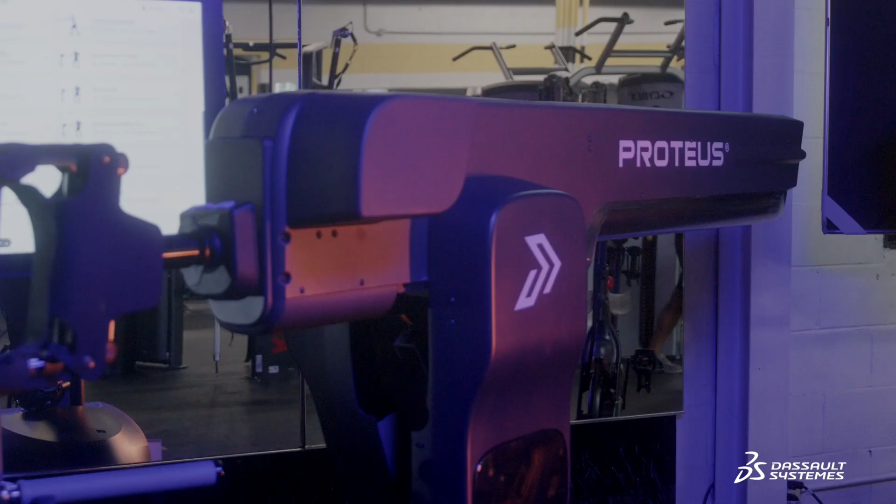Proteus Motion is a sports science lab in a box. It's a completely different modality of training, something you can't replicate with any other machine. We've proven through laboratory testing that the muscle activation from three-dimensional resistance, compared to existing methods, produces much more muscle activation, giving you a more efficient workout. Anytime you move the machine, it directly opposes your motion.

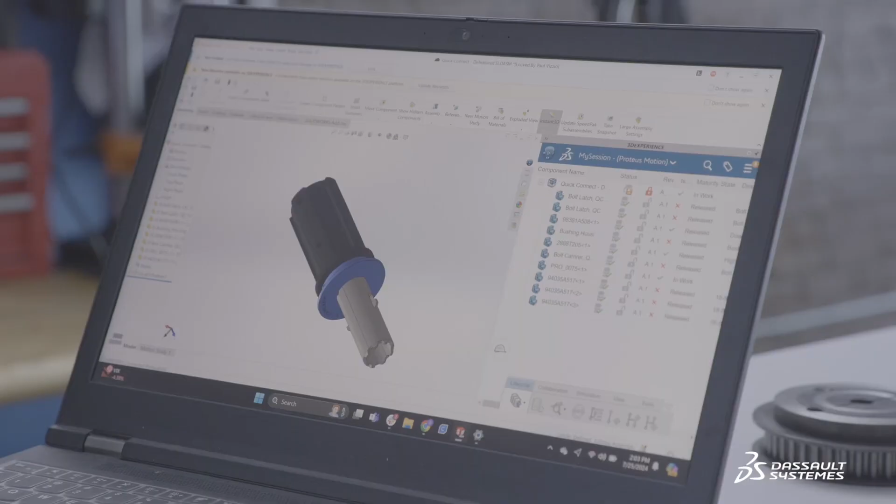The hardware takes a lot of CAD, and that's really where SOLIDWORKS comes in. We needed surface modeling, more advanced features, Hole Wizard, things like that. We were in COVID times, and I found out about the 3DEXPERIENCE version of SOLIDWORKS at that point. Once I saw what was being built, I was like, okay, this is exactly what we need.

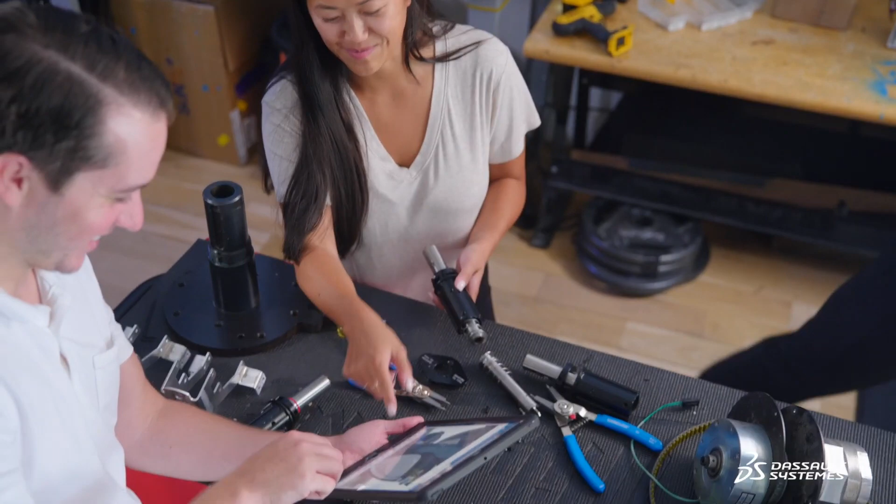We needed some type of cloud-based platform, and having it running SOLIDWORKS is the best of both worlds. We got really good at being able to work together remotely through the platform. It's great to be able to open up a design together, look through it, and go through everything live.

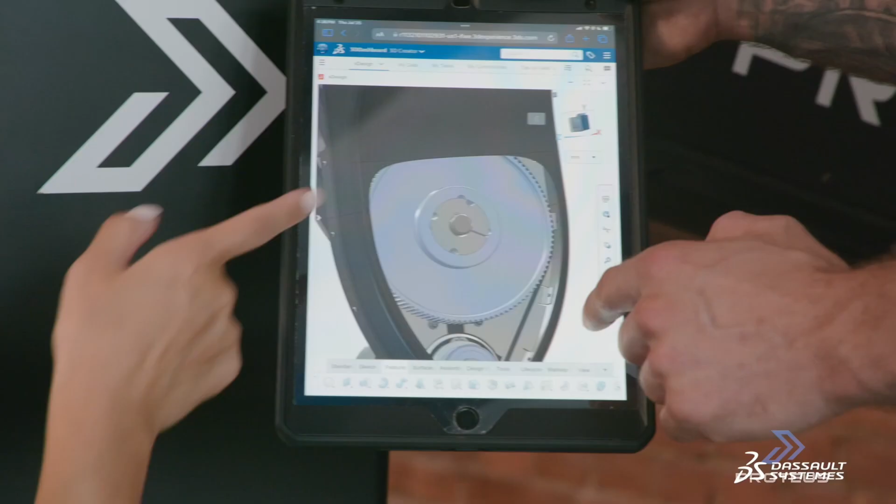The capabilities of SOLIDWORKS are pretty limitless for us in terms of the modeling, the drawing, and the management side of things. Something that helps alleviate stress in my day is being able to manage that lifecycle stuff right from the side panel. So I'm in a model, I make a change, I save it, I get that little check mark that it's saved to the cloud, and I can let Paul know the model's good, and he's got every up-to-date change I've made in the last 5-10 minutes on that model.

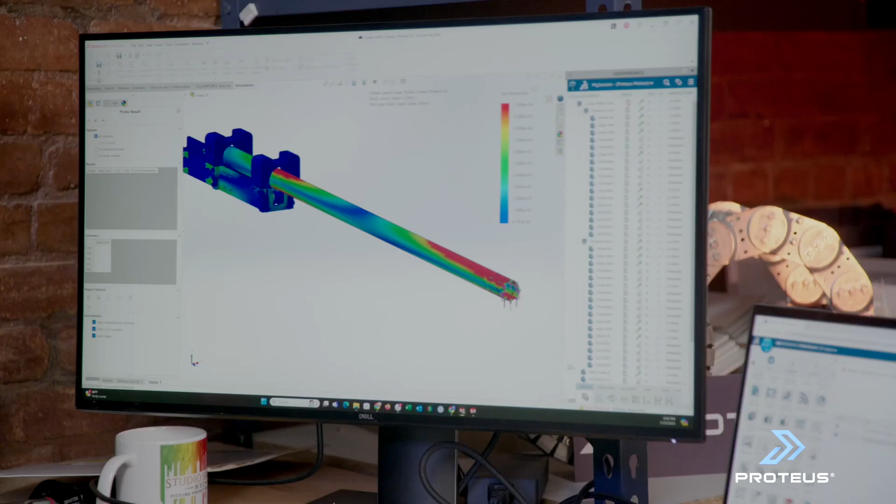We needed rendering capabilities and FEA capabilities. FEA simulation has definitely been a huge help for us, as you can imagine, having professional athletes on this machine, it undergoes a lot of force.

There's probably 300 unique parts in this, and each one is used multiple times. With simpler CAD platforms, that just breaks them, and it gets really confusing with mates and constraints and things like that. That's another reason I liked SOLIDWORKS, it worked much better with larger assemblies than what we were using beforehand.

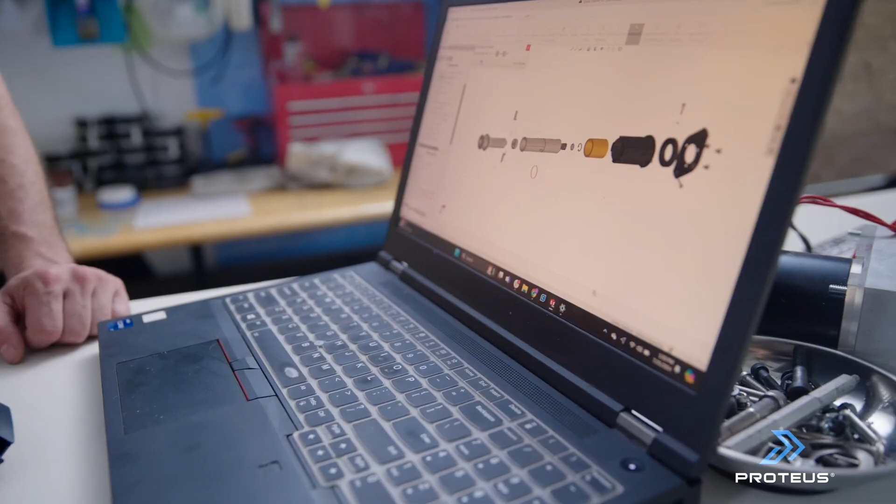It's just been that much easier with my collaboration with Paul, especially those drawings in the beginning, getting those done as fast as possible so that we can really start working with an external manufacturer.

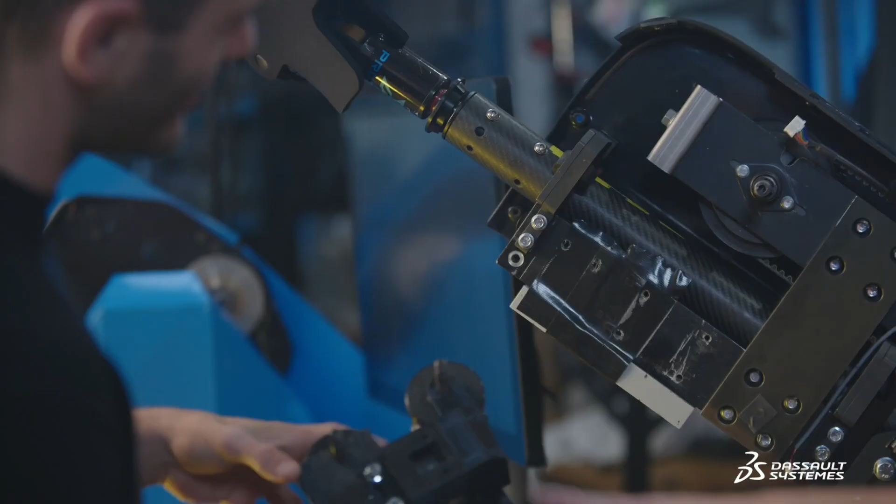When I think about where Proteus is going next, I see continued growth of machines across the country. I also see the ability for us to make some really cool design changes that we haven't been able to focus on, just because we're a small team.

SOLIDWORKS is going to help us in that journey, seeing how design changes play out on the product through the model. We're always going to make improvements, even down to things like our packaging and the user experience of unboxing it. All of those things we design in SOLIDWORKS, and it's going to have a huge effect on everything for us moving forward in getting a better customer experience.

Okay, so now we've been introduced to Proteus. Let's use the Proteus apparatus to show what's new in SOLIDWORKS 2025.

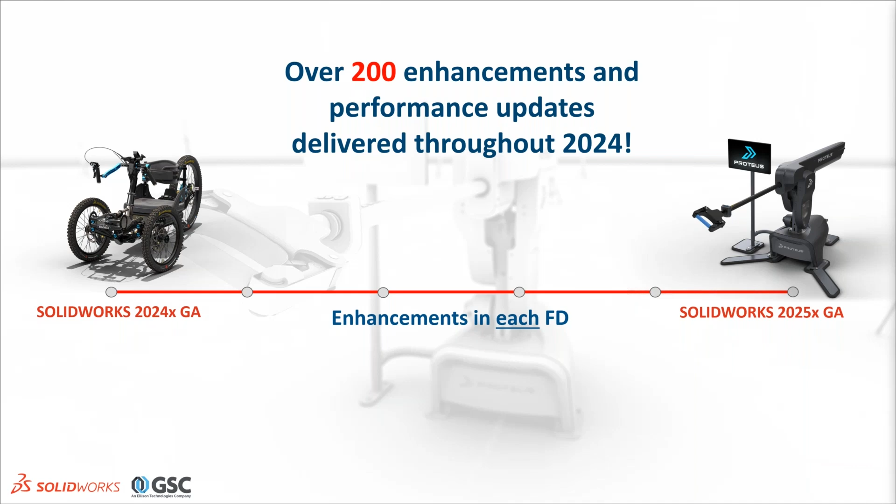I also want to point out not just 200 enhancements, but another number: 33. That's the number of releases now of SOLIDWORKS, not necessarily the number of years. SOLIDWORKS was first released in 1995, so it's 29 years out there, but early on we had two major releases in the same year for a number of years. So this is the 33rd major release of SOLIDWORKS.

In addition, there's another meaning personally for that number: this is my 33rd year at GSC. I predate SOLIDWORKS, and GSC predates SOLIDWORKS, having come to the company in '92. I've completed 32 years, I'm in my 33rd year at GSC. Some of you have been around for the bulk of that time, and every once in a while we look around and say, wow, things have gotten pretty awesome and have changed quite a bit.

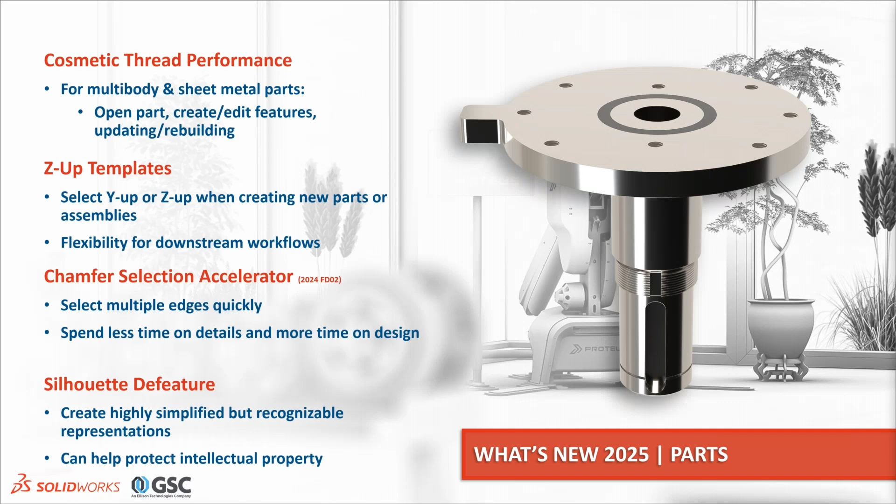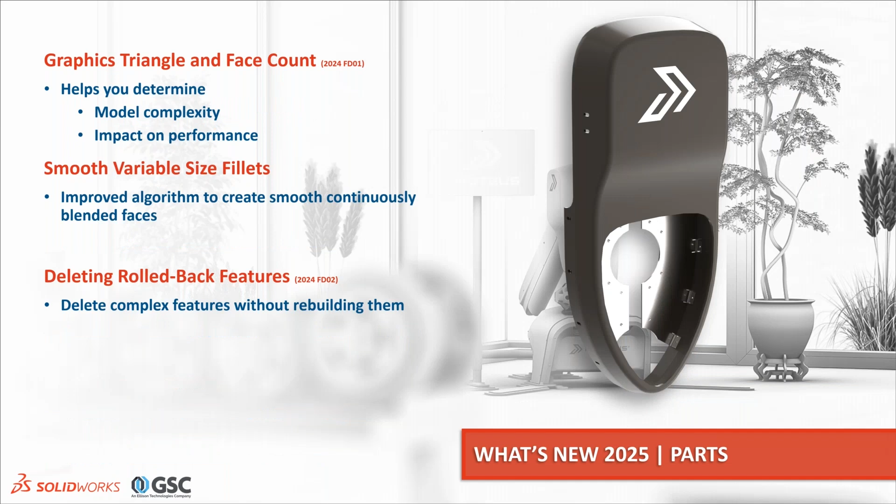There are some nice little behind-the-scenes things that make some things go faster, like with cosmetic thread. Some of you longtime people might notice Z-Up is a thing now. We have some enhancements to some old favorites like the chamfer tool and variable radius tool. We're getting some additional diagnostic tools and repair functionality that's really nice, as well as new and streamlined workflows for things like measuring a projected area of a 3D part. So let's get into it.

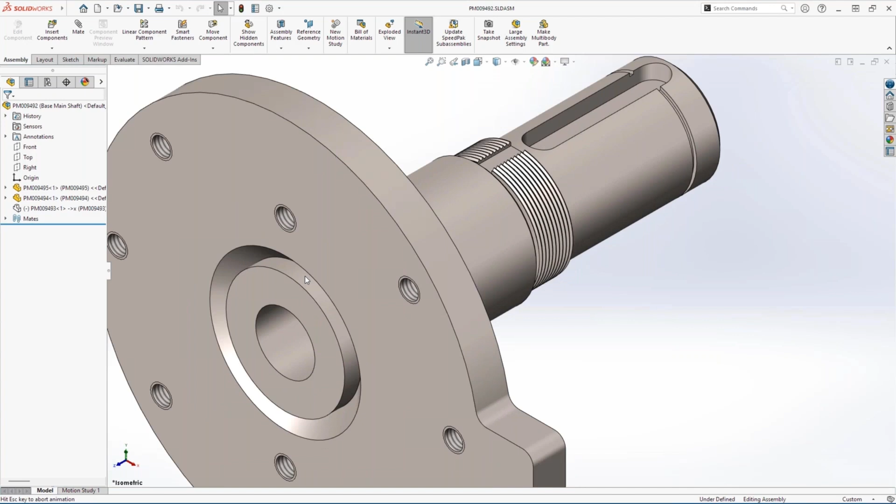First of all, when you have a lot of cosmetic threads, like in the parts in this assembly, you should notice a significant increase in performance just working with those. When I take a look at this assembly and want to make a multi-body part for manufacturing, notice we have Z-Up as an option for new parts created out of our new template.

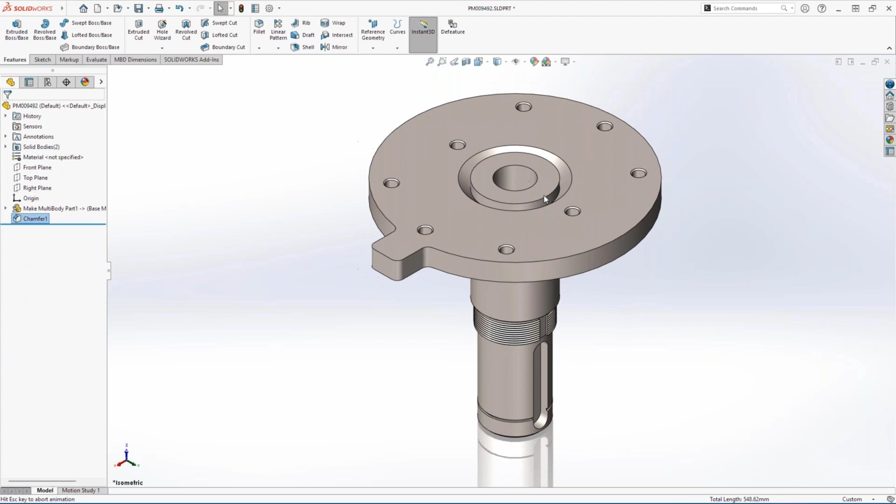So this is a multi-body part. I'm going to do some chamfers on here. You'll notice in 2025, when we do a chamfer, we can now have the same selection accelerators we've enjoyed for years with the fillet command, now available on the chamfer command. I'm going to do a new thing called a groove bead between these two bodies, just picking these two faces and having it put that in there. We'll explore that a little bit more later on in our session.

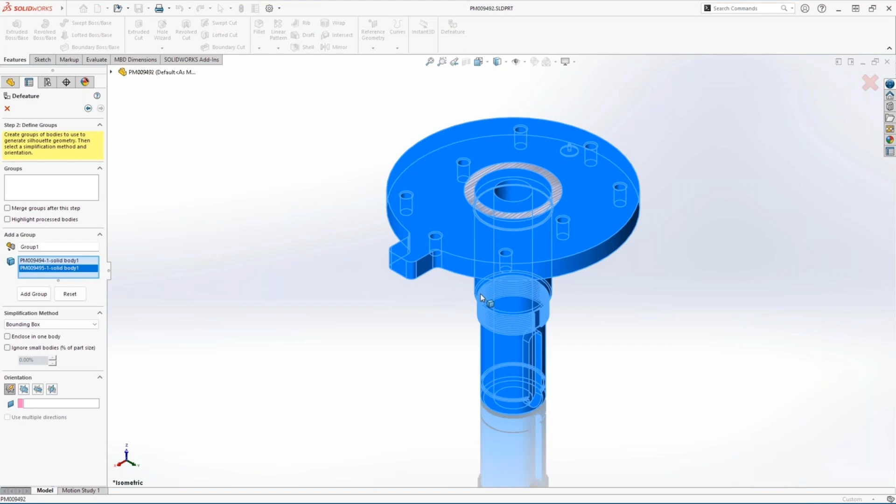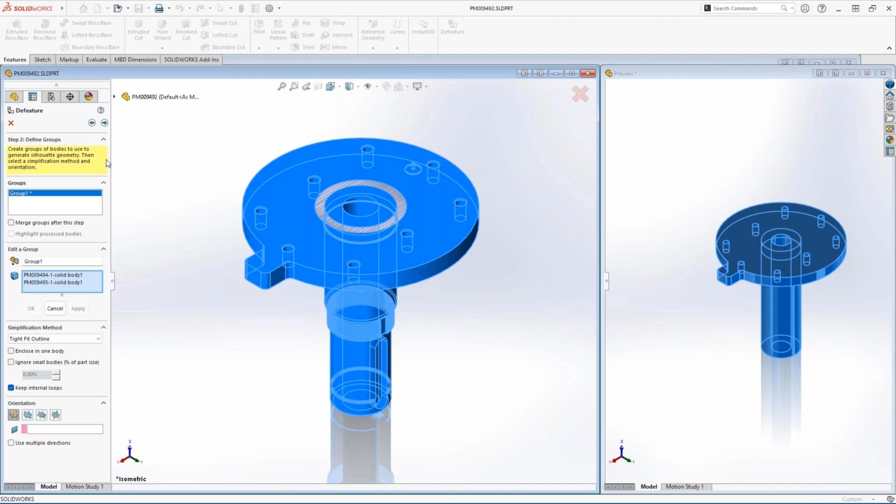And when I save this, I want to first defeature it. New in 2025, we can do the silhouette defeature method, which is the preferred, faster method for parts, even multi-body parts, whereas before we could only do that with assemblies. So for the multi-body part, we can go through and say we want to just do bounding box or cylinders. You can see it build up in the right-hand window, a preview of what we're doing: polygon outline, a little bit more detail. We can go through each one of these things, group them together to do multiple bodies at once or treat them individually. When we're done, we can either save it as an external file or create it as a new configuration of the part we already have. So silhouette defeature for parts is new in 2025.

Now let's take a look at the performance evaluation. We can see here that we now get the face count and the graphics triangle count right away. So I look at this as like 26,000.

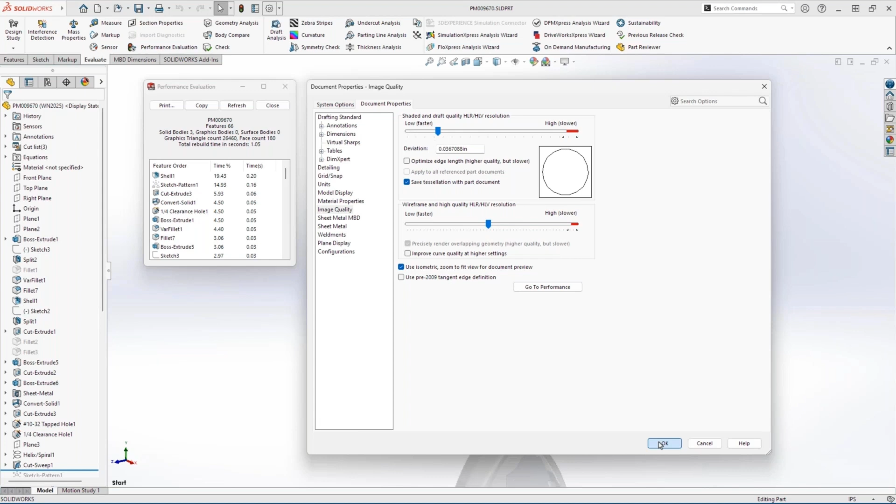That's an awful lot for a part like that, and that's because someone moved the slider on the high side of the tessellated graphics. This is just graphics only. This has nothing to do with the surfaces themselves, but it does increase the overhead for the system.

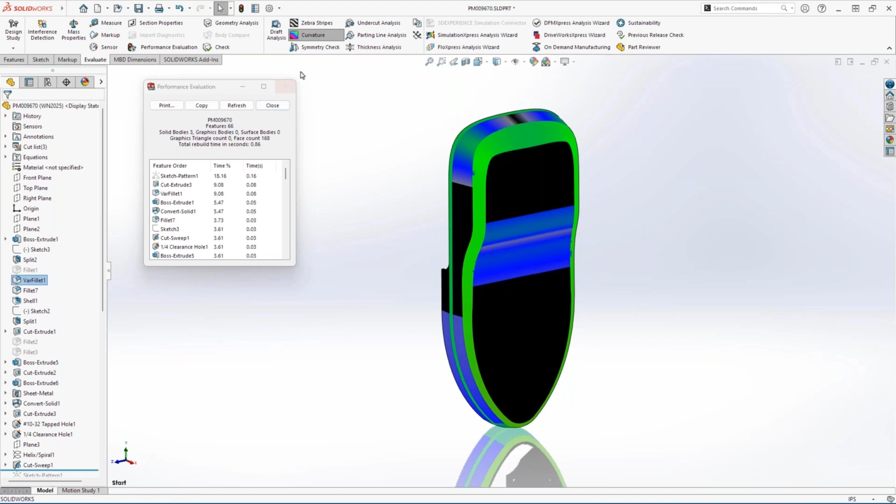So now we got this under 10,000. Looking at the curvature, we have kind of a pinch point with this variable radius fillet. This is one of my favorite new things in 2025. We now have the continuous edge blend. It just makes using variable radius fillets, I think, easier for everybody to get that functionality of varying a radius, but also being smooth and easy to make a nice looking fillet.

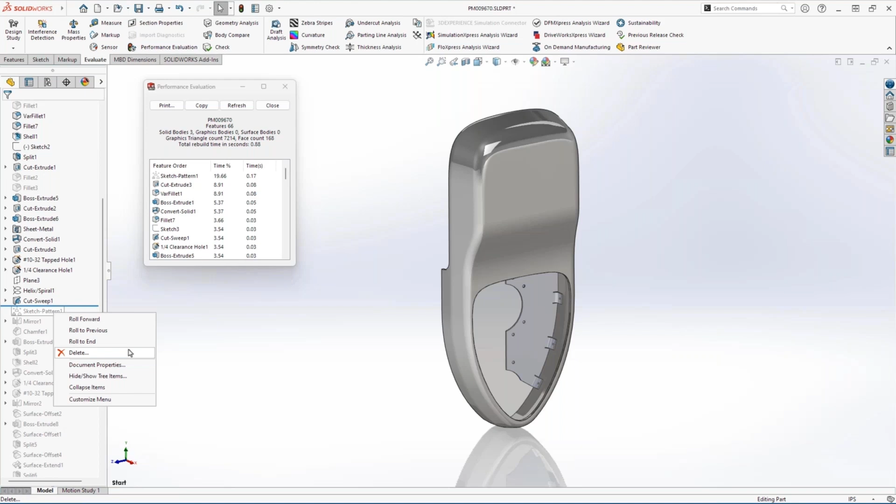Now we have this sketch pattern that's 18% of the rebuild time, and it's based on this sweep feature. What is that? Well, someone cut threads in this thing, which we don't want to do. I can delete that sweep easy enough, but sometimes you're in a situation where you have a feature that is past the rollback, and you don't want to just rebuild it and wait for it to delete it. Now you don't have to. You can delete features even if they haven't been rebuilt. So that's a really nice functionality there.

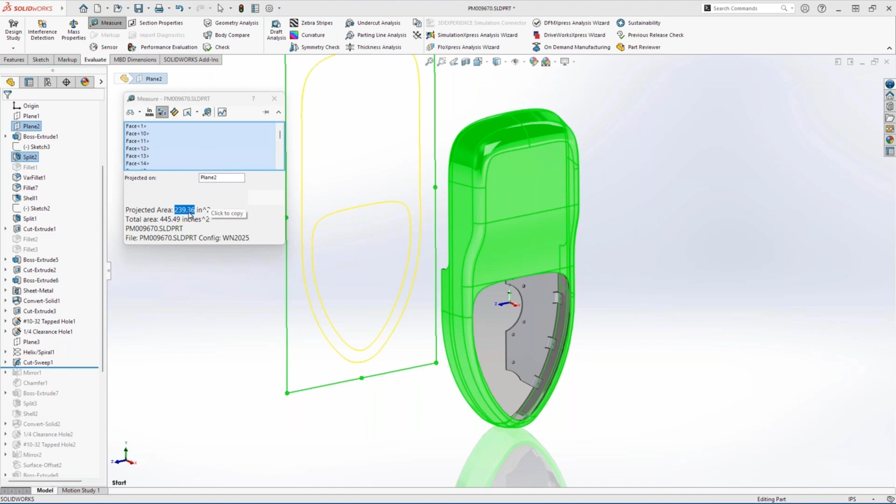Let's go ahead and select all these faces, and this is the measure command now. I'm gonna select all these faces, and I'm gonna select the plane. And as part of the measure command now, we can just project outside area right onto there and get that projected area straight away. So before to do that, you'd have to make a sketch and project the edges and measure that. Now you can just do it straight away.

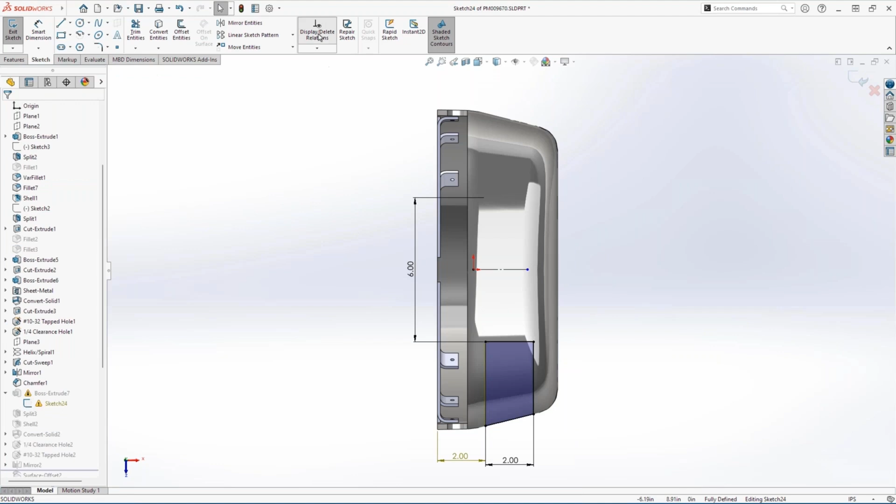Whenever a situation comes up where you have a dangling dimension or relation in a 2D sketch, you know the drill. You go in and edit it, you look and see what's wrong, you go ahead and find the red handle maybe and drag it on to like what was missing, which you can still do. But now we can use the magic auto repair sketch relation or dimension command, which if you look at this under display delete relations, it's also available. I can look at it, say find a replacement for any of the dangling ones, or I can just repair all dangling. Like all the auto repair commands, I always recommend do it first. If it does it the way you want, you're good. If it doesn't, you can help it. Well, you know, you got some help there anyway.

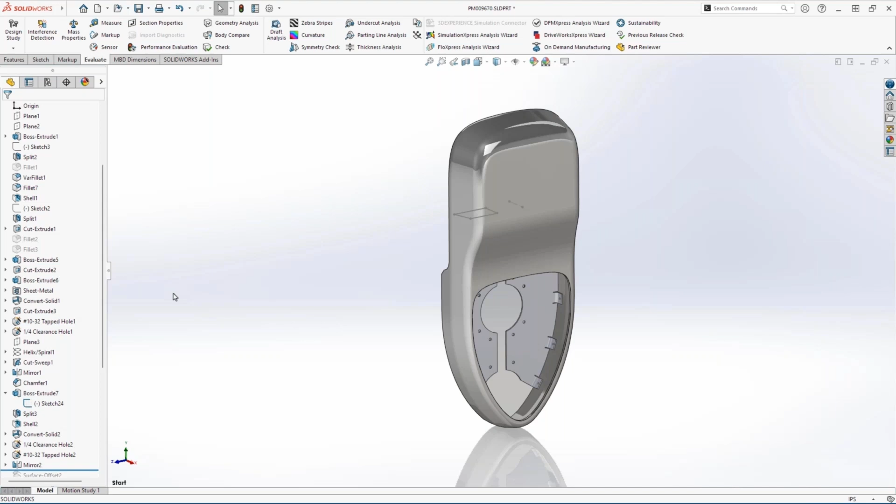So again, as you know, we're talking about workflows and speeding things up. One of the things that does happen in modeling is things break, things need to be repaired and things like that, mates and sketches and that. Where you've seen over the last several years, SOLIDWORKS, you guys pay attention to that and making those workflows faster and as automatic as possible.

We can now also do a better job converting mesh bodies to standard BREP. And in fact, for things like planes, cylinders, cones, and spherical faces, we can do that automatically now. You don't have to click on them discretely and do them individually.

Also, beam lattice, we have some X-apps and some other tools out there that create these lattices. We can now actually import those into SOLIDWORKS as different kinds of geometry, whether it's a parasolid or a graphics or a wireframe mesh, you can do that now.

And I know a lot of people have asked about this over the years. Yes, we can now finally do linear and circular patterns of reference geometry. So you can pattern planes, you can pattern axes. Finally, we can do that.

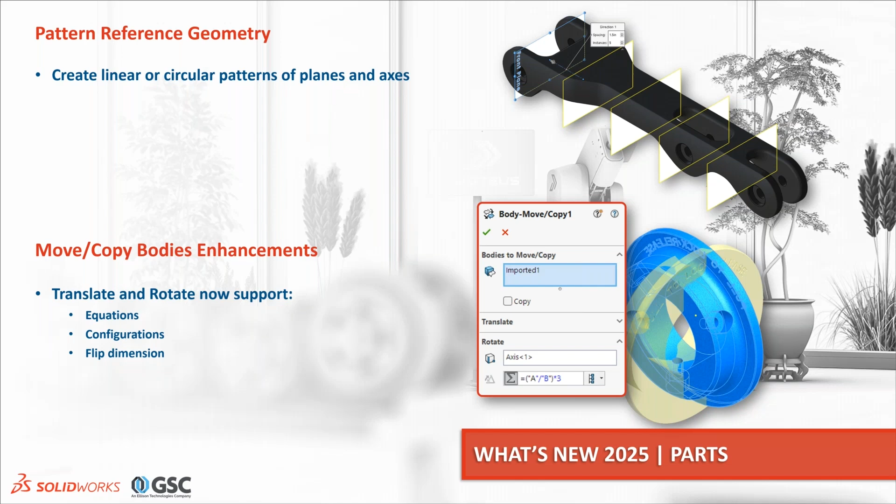When you're doing a move body command, when you're translating and rotating, you can now use things like equations or configurations or flip the direction with the dimension as part of those translation or rotation actions.

We can now generate a curve through XYZ points at a specific, i.e. usually custom, coordinate system as its origin. So that's something that a lot of people have asked for. You can do that. And when you do that, you can also update the curve and then use the reload button to update it as you go.

And then here's a nice little thing, but you know, it's one of those things that like if you do it a lot, it's kind of annoying. We can now, when you're doing the convert entities command in a sketch, you can now just right away say, oh, by the way, this is for construction. So before you convert the entities, then you had to go in and grab them and change them for construction. Now you can do that in the convert command right away.

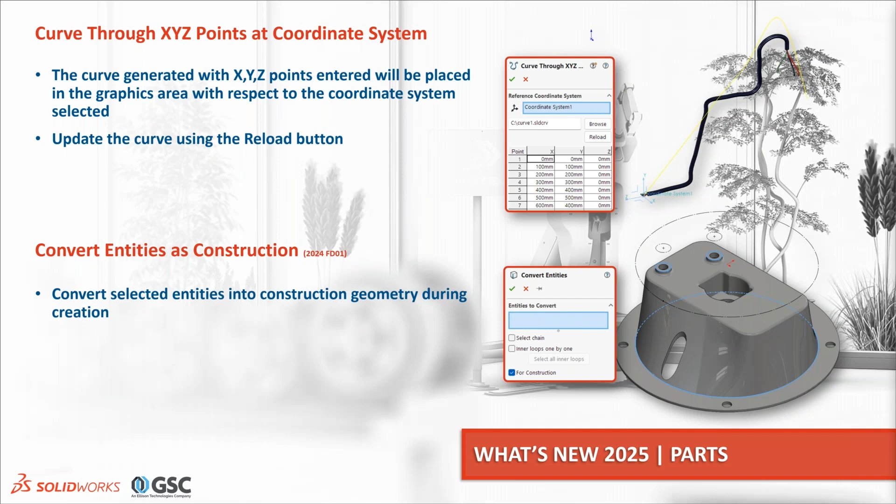All right, so that's a lot of what's new in parts and features. Now let's go ahead and look at specifically some new things in sheet metal and weldments.

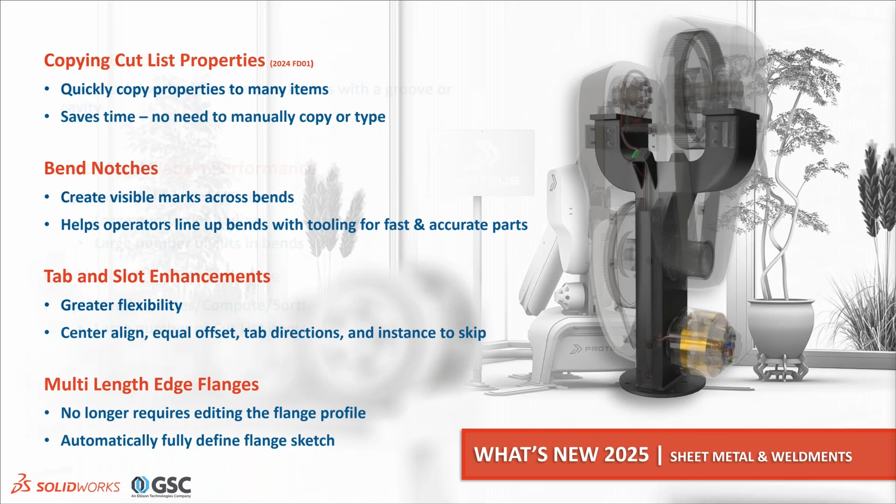Maintaining and distributing properties and cut lists are way easier now. Bend notches are a big crowd favorite when I've seen this presented before in different places. There's versatility with the standard sheet metal commands, the groove beads you've kind of seen already a little bit here. There's also some behind the scenes performance improvements in terms of folding and unfolding when you have a lot of cuts inside of bends and things like that.

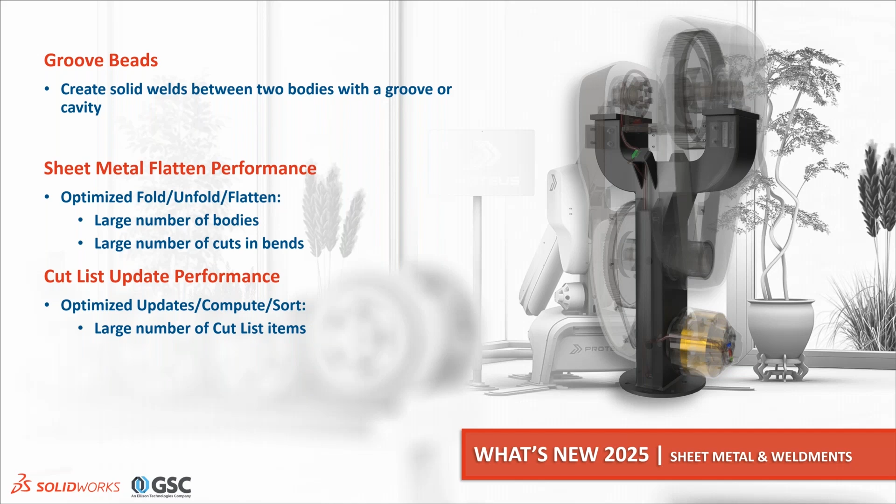So we look at this mounting yoke here. I'm going to go ahead and look at the cut list properties. I'm going to add a new property. It comes up, okay, I want to add one called process, and I'm going to put in water jet to the first value. Now what we can do is we can copy those to, in this case, I'll say all the other cut list entities.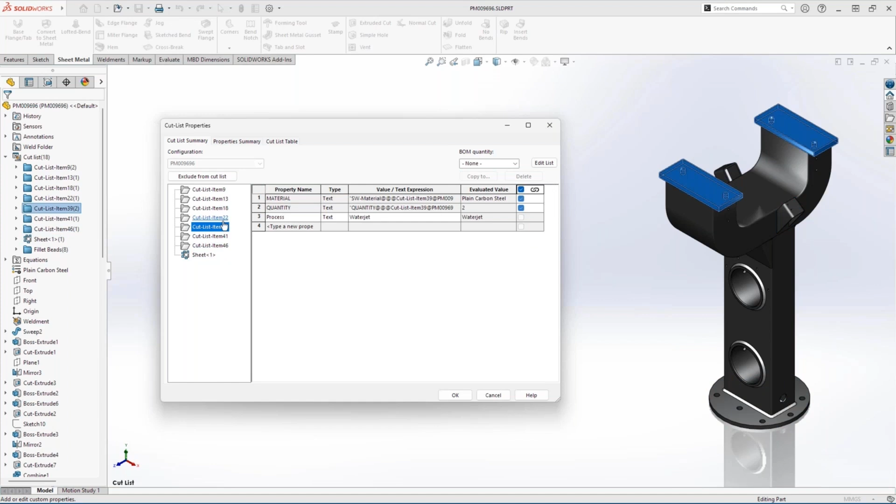So now I just copied that new property called process and that value called water jet to all of them in one shot. Now some of these, the value is not going to be water jet, it's going to be something else. So in this case, I'll say change to bandsaw. I'm going to copy that and then copy it to not everything, but to certain other items. So I can copy new cut list properties everywhere, and then I can also copy variations in value really, really quickly with these copy to options right in the dialog there.

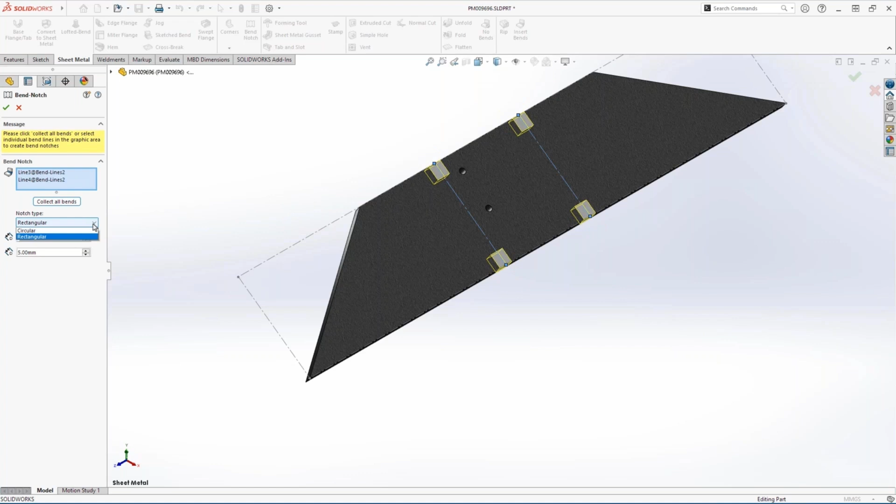Very handy. Looking at this bracket and flattening it out, sometimes on the shop floor it's hard for people to exactly line these things up because the bend line is just kind of virtual there. So what we can do now is automatically put bend notches in on the ends here. You can make them rectangular or circular or square notches, and change the size. It just helps people on the shop floor line these things up in the press brake so they get them bang on right away.

Also, tab and slot, very useful, enhanced in the last number of years, but there's some often asked for enhancements along the lines of alignment and centering. So now when I offset, I can say equal offset to both sides, which makes it easier to do what I want to do there.

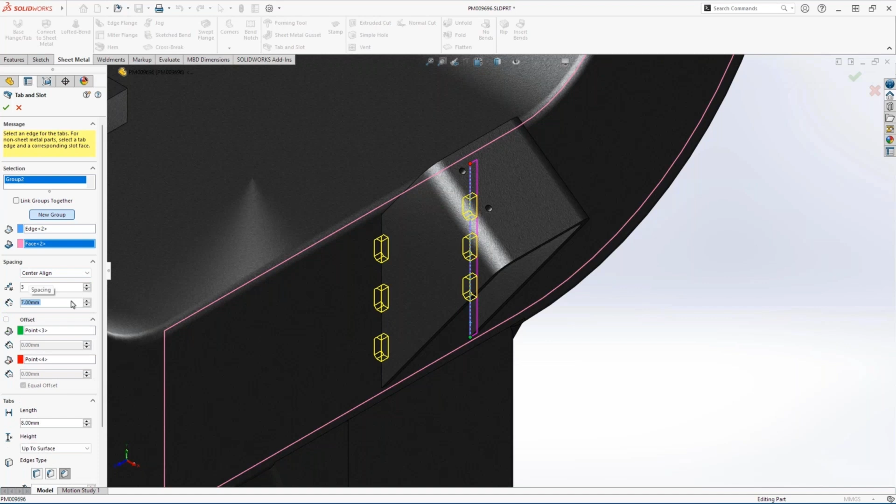And then I'm going to have the same item in the same new group here. Instead, I'm going to vary this a little differently. So I'm going to do a center align, which is also new, and just align it center, 7 millimeters either way. And by the way, in this case, I'm going to skip the middle one. So I'm basically making it so it's keyed and easy to orient the right way when you put these together for welding. Looking at the flat pattern, you can see we have all that already there, including those bend notches.

Doing an edge flange is really easy. Just grab an edge and move it down. You can grab more than one edge if you want to. It's in the same feature though, so they're going to be the same length.

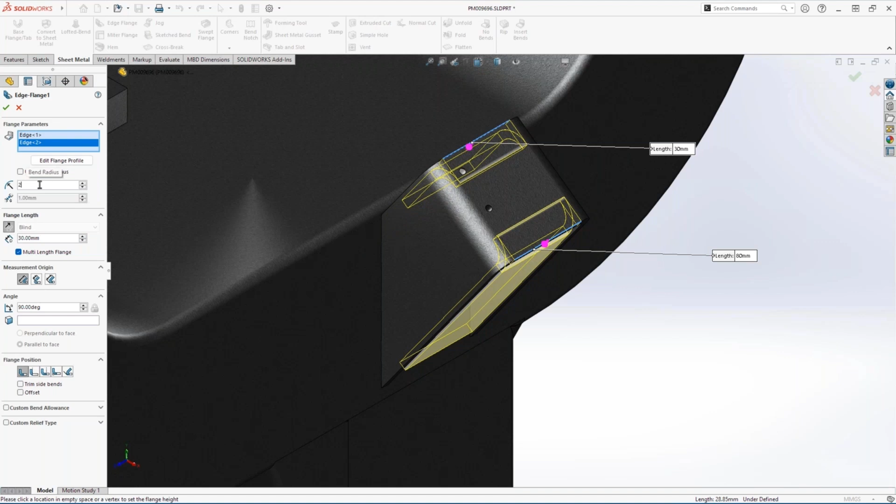Until now. I can now toggle on multi-length flange. So I'm doing an edge flange, but I can say, well, the inside one is going to be not as long as the outside one. Let's go ahead and change the radius a little bit and tighten it up. You'll also notice here when I look at edit flange profile that it's no longer underdefined, because the flange length is actually driven by the edge flange dialog itself. So we don't have to worry about that kind of thing in some companies where that's a flag.

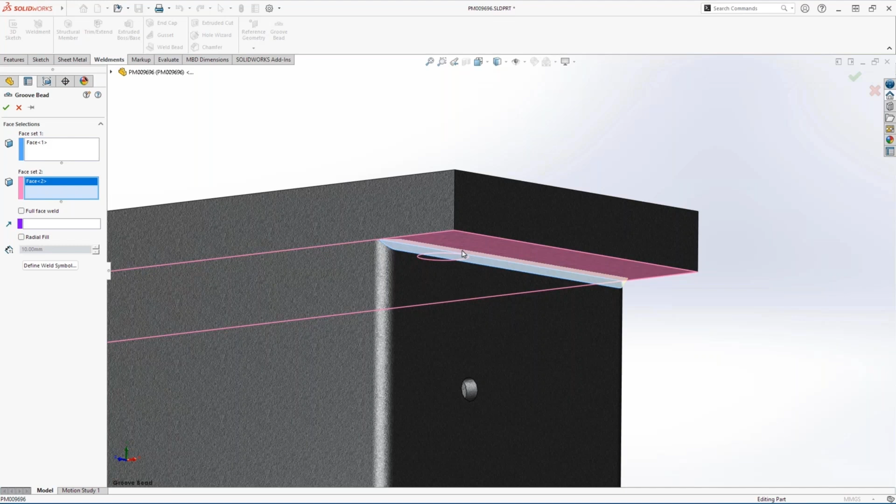Got some gap here. I'm going to add the new groove bead, and this is how it works. You just basically pick a couple sets of faces here, and you can define a weld symbol as well. They'll come in drawings if you want to, or if you're doing MBD now in 2025, you'll see that next week, how that works.

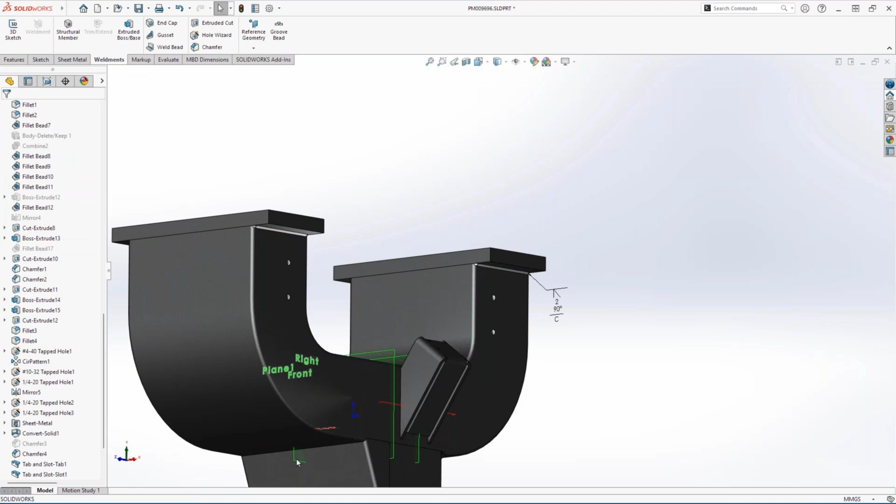Because these groove beads are done as separate bodies, it's really easy to mirror them. In the last couple of releases of SOLIDWORKS, we've added enhancements so I can mirror in two directions at the same time. With the recent enhancement, you can hit the Q key on your keyboard to bring up reference geometry on screen, pick the right plane and the front plane, and mirror all those in one shot really quick. So a lot of nice little enhancements to sheet metal in SOLIDWORKS 2025.

I particularly like the enhancements to the tab and slot and also the edge flange. I do that a lot.

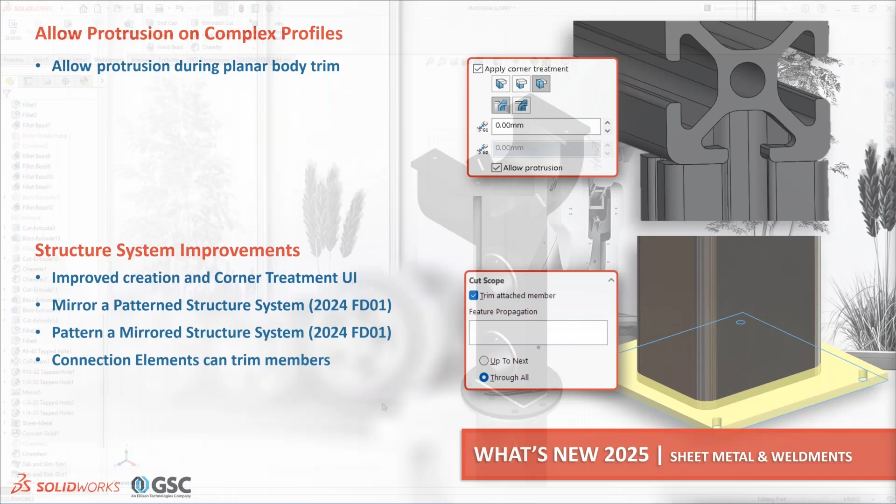Also, when you're doing complex profiles in weldments, you can now allow protrusion during planar body trim, so you can have that more complex, like 80-20 kind of stuff going on. You can see how we can make a nice trim there.

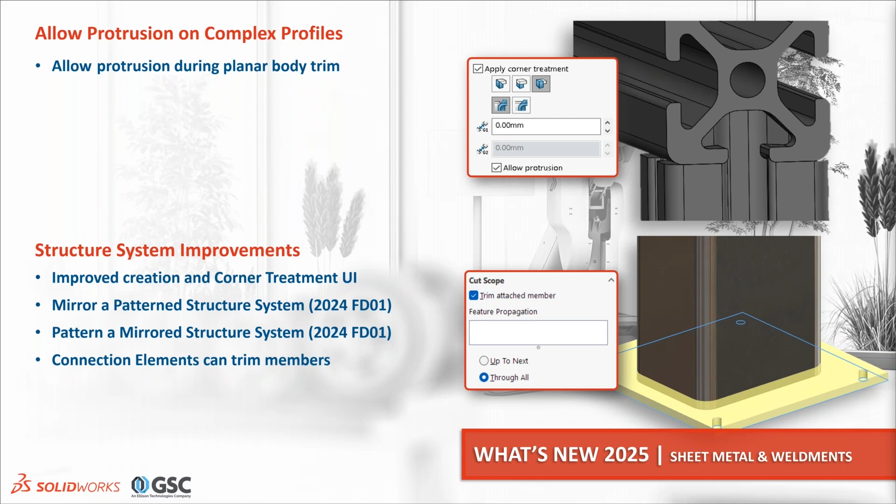And using structure systems, we have some nice improvements overall. For example, you can now mirror a pattern structure system or pattern a mirror structure system, as well as a better UI wizard step-through for corner treatments. And something I particularly like, since I tend to use a lot of connection elements now, especially for end caps, is you can now use those as trim members when doing this, which saves additional steps. So some nice enhancements to sheet metal, weldments, and structure systems in 2025.

Now let's take a look at a whole bunch of enhancements in SOLIDWORKS assembly modeling.

Some of these are focused on performance, because SOLIDWORKS is never fast enough, it can never be too fast. So we have performance enhancements in the performance tools, as well as giving you more information, easier, so you can see things. Two things I love are the display state table and document groups - they're super awesome - and also copy with mates. You can now copy with mates with reckless abandon; doesn't matter what kind of mates they are, they'll all copy with mates just fine.

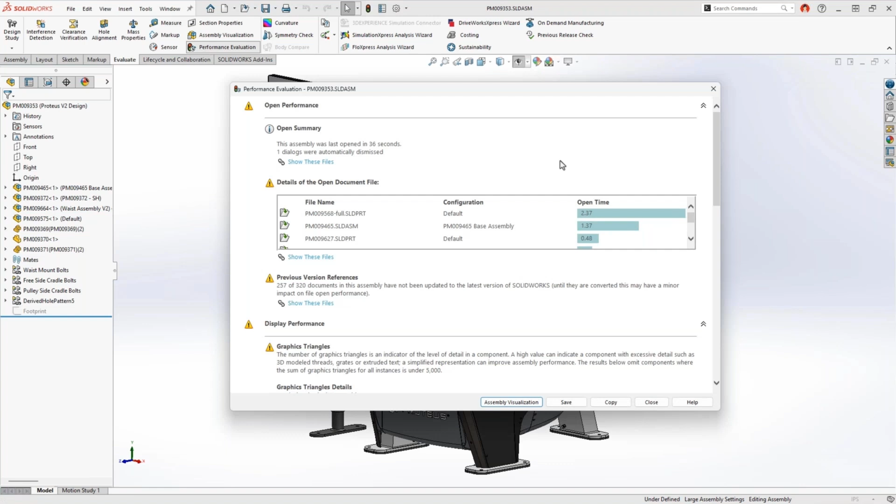Taking a look at the top level of the Proteus here, when I look at the performance evaluation tool, we now have more information, additional sections that give us info we didn't have before, like how many documents are in a previous version of SOLIDWORKS, so you can see that right away. And also graphics triangles - anything over 5,000 triangles gets flagged, and I can even open them directly. So what the heck is 2 million triangles?

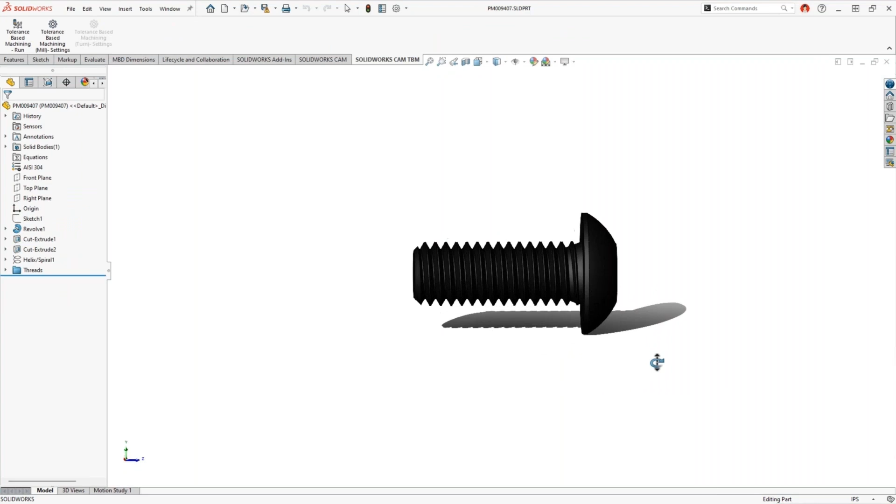What part is that? I look here and say, oh, somebody modeled a machine screw, but they modeled it with high surface definition and modeled the thread. We'll deal with that later. But that flags it out real quick.

If you're using SpeedPak, it's now a lot easier to make SpeedPaks in 2025, because you can create them at the top level of the assembly and then drill down - before you had to go to the bottom level and work up. Much easier that way.

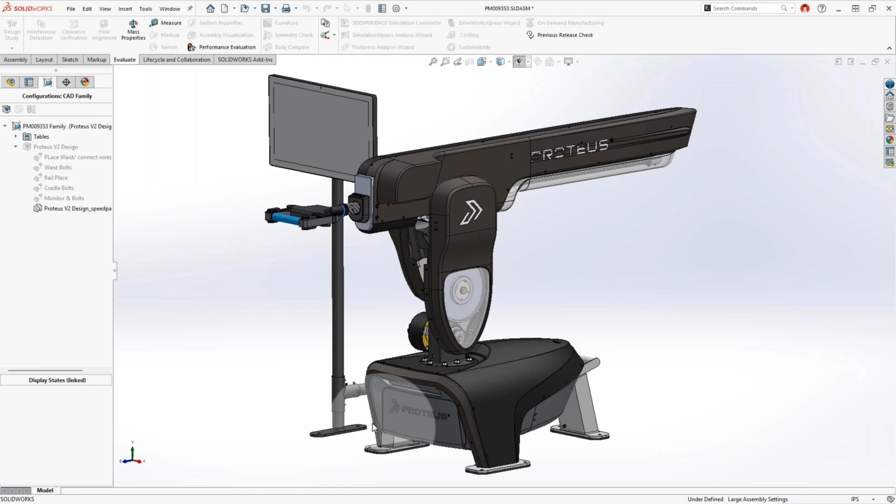Also in SpeedPak, you know that graphics circle that shows what's really there versus what's just virtual - in SpeedPak you now have control over the opacity. Some people don't like the stark difference between those two things, so you can change that look and make it a little more subtle if you want to.

We'll go ahead and close this out, and let's talk about large design review, LDR. It's one of my favorite things in SOLIDWORKS for large assemblies. You can open things in LDR, and every year they've added more and more functionality to it.

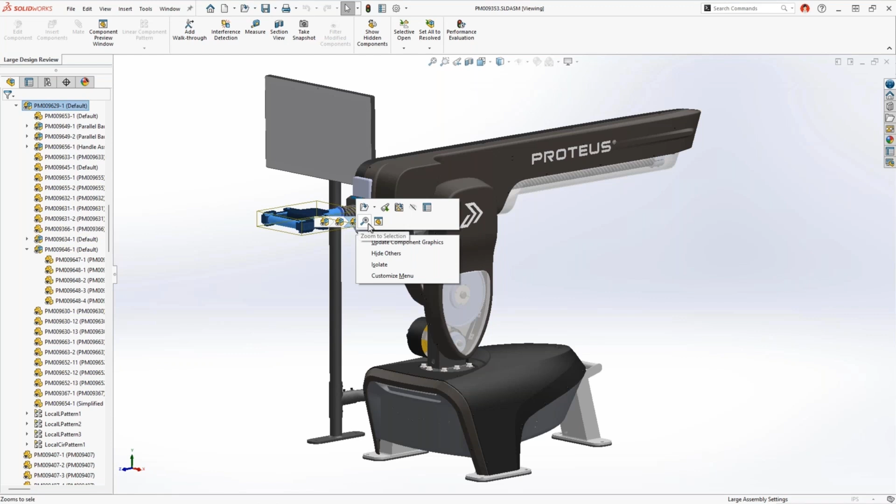Now in 2025, when you're in LDR mode, you can use breadcrumbs and navigate your assemblies and sub-assemblies. You can also use the wonderful, and probably underused, component preview window to grab things. And amazingly, when you're in LDR now in 2025, you can actually do interference detection. This is at the graphics level, so it's not for super tight tolerances, but for most things at this large level, it's gonna be just fine.

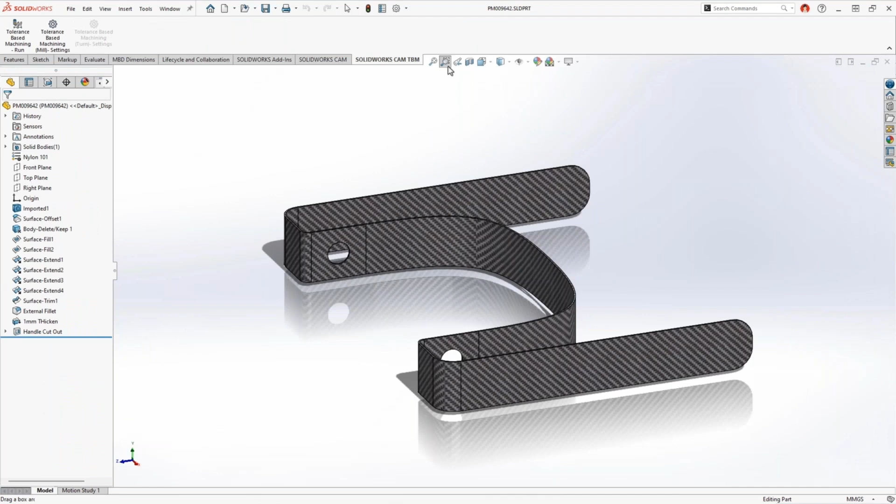So it grabs and sees there's an interference between the hole in that guard and the handle shaft. I'll use breadcrumbs to open it up directly, and we can see here that we just need to add a little more clearance. So we'll knock the diameter up by a couple of millimeters to take care of that issue. Again, more and more seamless between working with LDR and fully resolved modes.

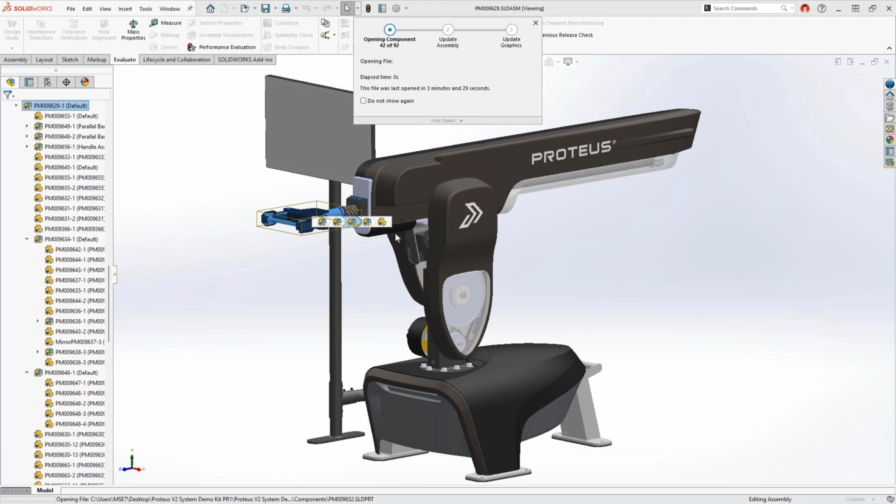And by the way, you can go ahead and use the breadcrumb to find a subassembly and open it up in its own window, fully resolved, if you want to go right there. Again, it's just those UI tweaks you've had that you just gotta kind of try them and you'll find out how useful they are.

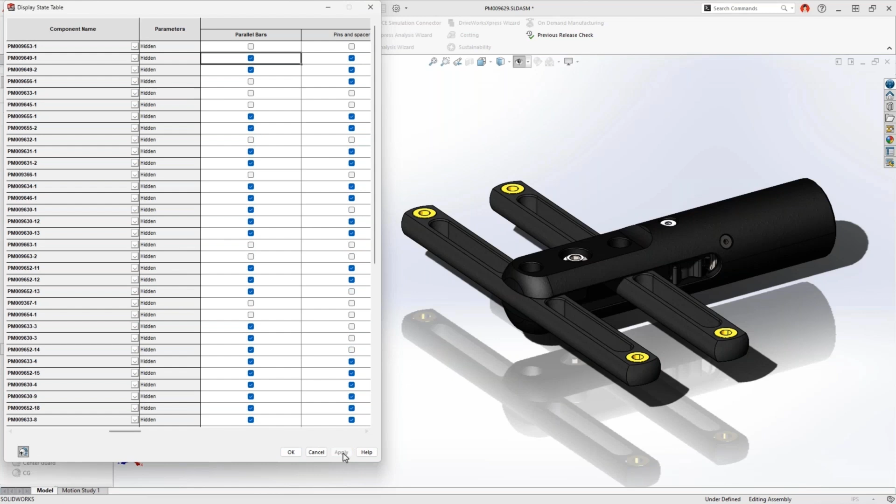Now I have a bunch of display states. Display states are great, and they're also easy to make, which sometimes we do lose track of them. In 2025, we have this awesome display state table. It's automatically made and maintained for you. This is just like what we did last year in 2024 for configurations, but now we have one for display states. So I can see what all display states are. I can actually modify what's showing and hidden in each display state, try it out by applying it, seeing what those changes are, and then either okay it and keep those changes, or cancel and get out of it. A great enhancement in 2025 that just will help you wrangle your display states.

I have 3 documents open. I'm gonna create a document group, so that way when I go home and come back the next morning, instead of going to each document opening it up separately, I can go to document groups, pick the document group I just made, and then open all those files in one shot. So that's another everyday time saver thing I love in 2025.

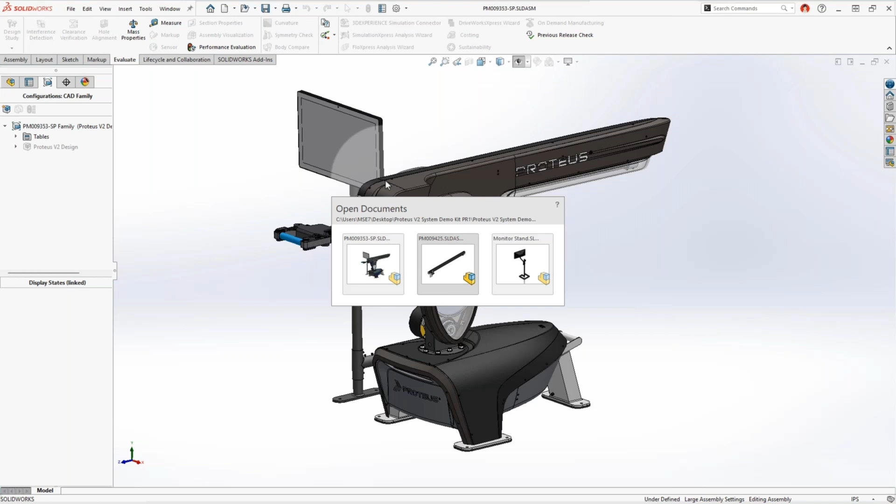Look at the boom arm here, and I have a display state exposing what we're looking at for belt clearance. The belt is just a part that's a surface. So now in 2025, we can include surface bodies in interference checking, which is great because I tend to use surfaces for things like belts. Now I can actually include them in interference checking, which is just a great time saver.

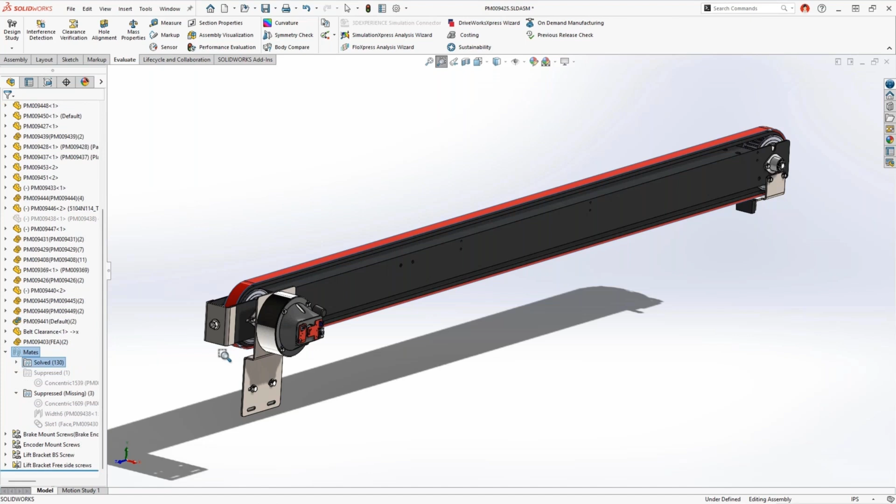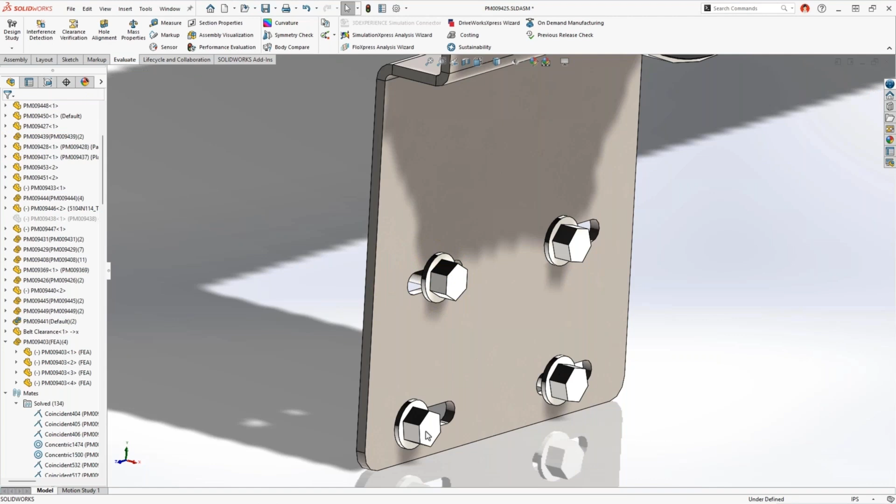Now looking down here, I have a couple of these sets of fasteners, and they're in there with a slot mate. I'm going to now copy with mates, and the copy with mates command is now unbridled. You can copy with mates whatever the mate they are. In this case these are slot mates, and I'll just go ahead and copy that set of fasteners to these two, and those are slot mates that are copied. Again, I can go in there, individually control them, set them to center or whatever I want to do. But now you don't have to worry about that.

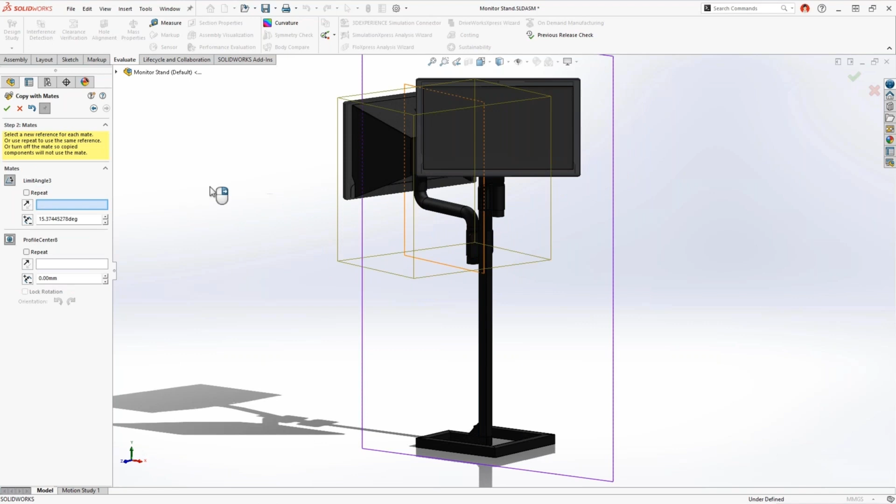So say to this monitor stand, we have sort of a limit mate, and we have a profile center mate on this guy. I can take that subassembly, copy with mates, and then find the face I want for the limit mate, and find the other face for the profile center mate. Again, those are advanced mates, no problem. I can copy that over there and take that whole subassembly and make that instance, and you'll see that the advanced mates are copied over just like they behave in the original. So that's a time saver as well, no more of the limitation there.

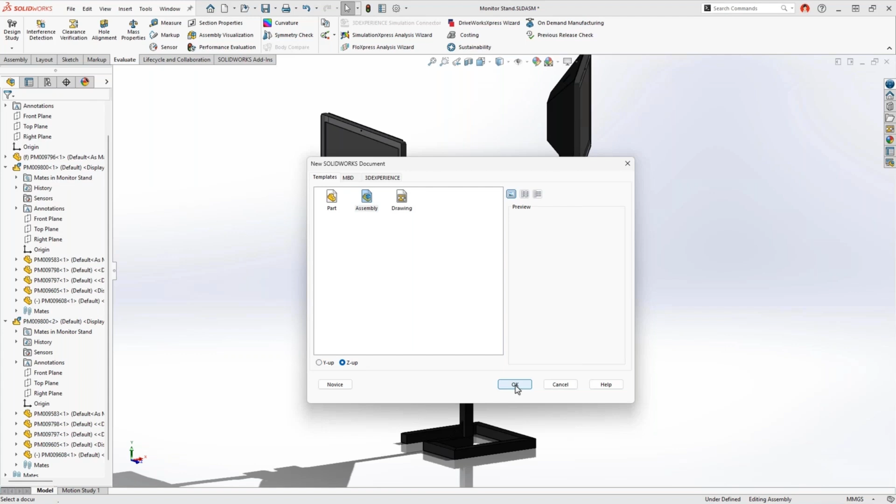When I make a new assembly, I want to make a facility layout. It's going to be Z-up. So when we do this, use the new Z-up option for our new template, and we'll start putting it in there. Now this is Z-up. You see, notice in the lower corner, Z is up, and the planes are named correctly.

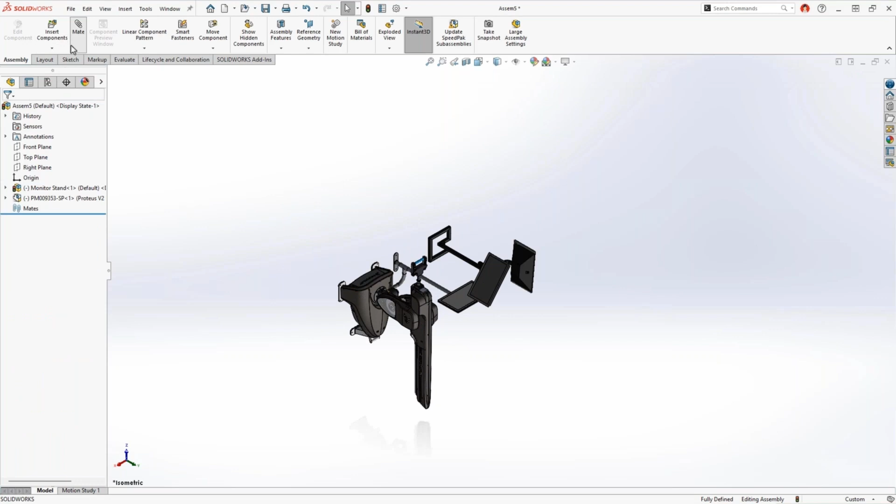I'm going to drop these SOLIDWORKS models in here. They were created Y-up, so they're going to be on their side, which makes total sense. But because I'm using the new, from last year, float component on insert, they're just floating out in space. So I can easily go in here and get the top plane for Z-up that's correctly oriented and named, and then just go ahead and mate these bottom faces to that plane so we can set up our Z-up facility layout, which we can then easily share with people using more architectural tools down the road.

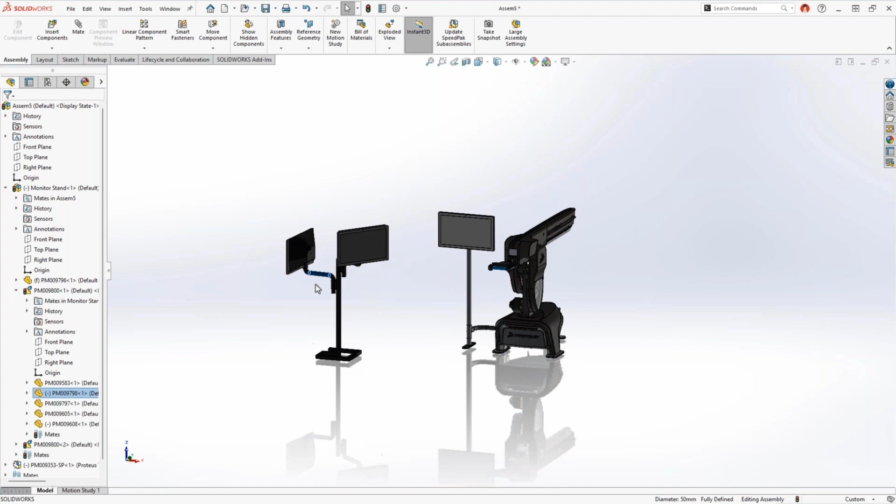Couple other notes here. When you're using the assembly visualization tool, we're including now 3D Experience, SOLIDWORKS connected type of attributes. You can define colors for specific values, you want to flag a certain value a separate color, and we support more properties than ever before.

When you're creating a subassembly, so you have an assembly and you're like, you know what, I want to grab these like 4 parts and make them their own subassembly, and you do that on the fly, okay?

In SOLIDWORKS 2025, you now have the ability to specify what the origin of a subassembly is. You can either reuse the parent assembly's origin, or use the origin of one of the parts. The way it figures it out is based on the first component you select when you create this, so you want to be mindful of that. Or you can manually select the subassembly origin with a point or vertex inside the model itself.

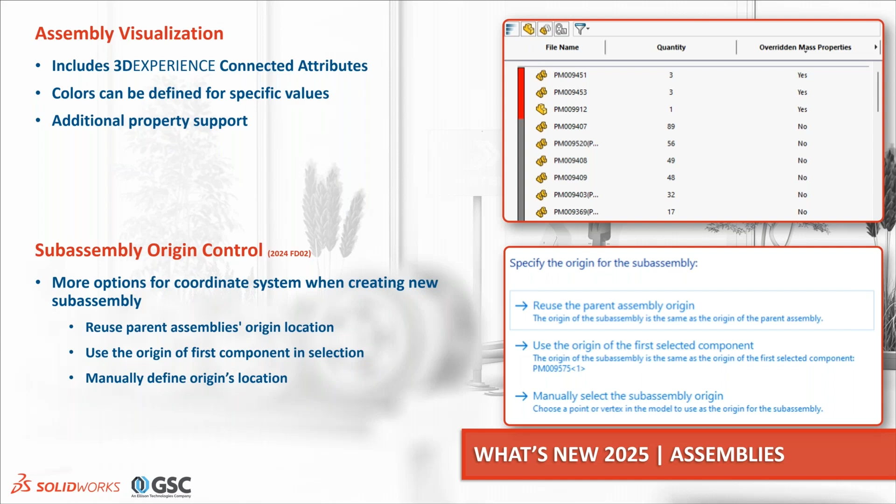When you have folders in your assemblies for organizing your tree, if there's anything under-constrained, in other words not fully mated, it's going to show that minus sign at the folder level. So if it's rolled up, you still know there are components underneath that aren't fully constrained. Also, when doing assembly-level sketches, you can now assign different colors so they stand out and don't just fade into the gray background.

The Reorganize Components property manager has been reorganized and improved to make it more clear when you're working with components that have extended assembly trees underneath them. It will clearly show which components you're going to move, the destination assembly, and also which features will be affected. It shows all of that in nice, simple, separate dialogues, or parts of the dialogue.

When doing assembly mass properties, it's now going to speed up the calculation. If there are subassemblies, parts, or bodies that already have mass property information in them, it's going to use that instead of running the calculation on all of those things, leveraging existing data to make the process faster.

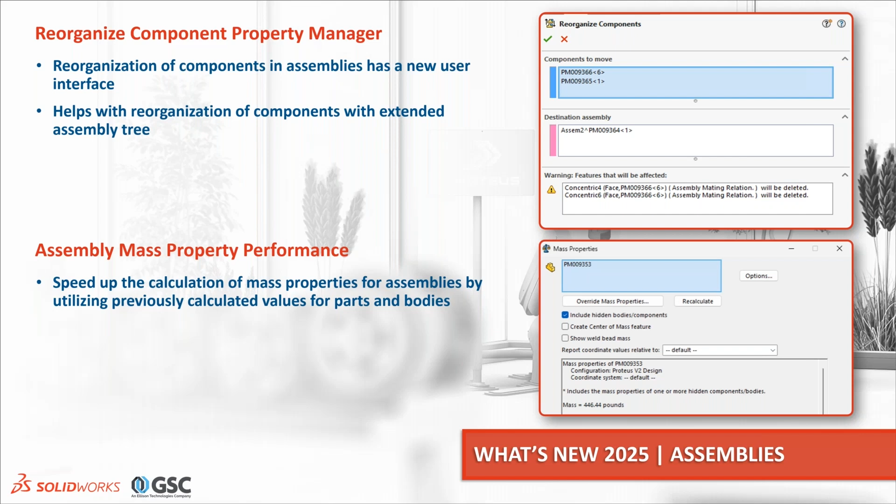You can now measure, in the measure tool, the angular rotation between different coordinate systems. So that's a new thing.

Also, when you do a component pattern, you can now link the display state of the pattern components to the seed component you used to create the pattern. So now you have that option, and you can synchronize that with display states. It's a separate option under the synchronized configuration.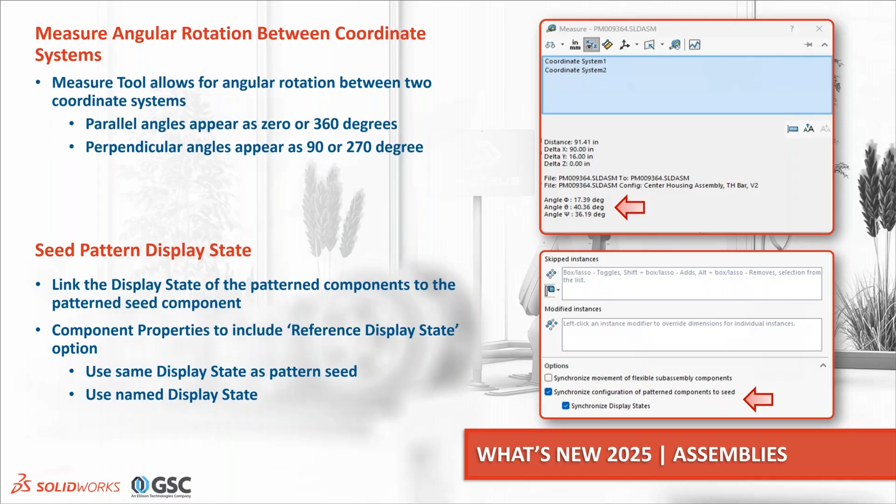So some nice enhancements to assemblies as well.

What I'll also mention here is that Z-up is for new files only. We're not going back and changing Z-up in existing parts and assemblies—that would be chaos. So what we're doing instead is introducing a new template in 2025. This is for new stuff going forward, like templates or copies or things you copy into files. In 2025, we have new templates for parts and assemblies.

The default templates now have a Z-up option. So if you want to create your own custom templates with a Z-up option, you'll need to create new custom templates from those new default Z-up templates, if that makes sense.

Again, this is not retroactive—imagine the chaos that would ensue if we could even do that, which we can't because the file's already cooked. Maybe you're thinking, hey, Y up is the SOLIDWORKS standard anyway, so we don't care—we've been doing it for 20 years.

But if there's a certain template you want to make, for example a part that's going to be kicked out for machining, or an assembly for facility layout that's going to be shared with partners using AEC tools, you can now make a new template using those. You have to make your own custom one, but it is now an option.